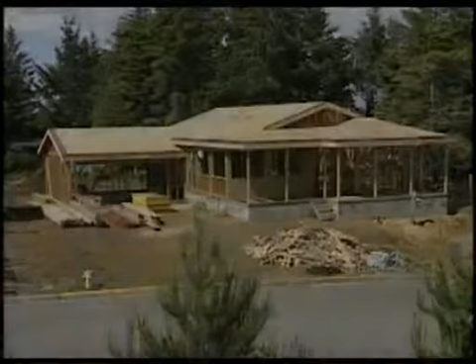Hi, I'm Larry Haun. My brother Joe and I just finished framing this house. It's a one-story, 3-bedroom, 1,600 square foot house, and it's fairly typical of the kind of house that you find clear across the country. Now, normally speaking, it would take the two of us, plus a helper, 1 week to frame it. There's some reasons for that.

It's not a real difficult house to build, but more importantly, we've broken the building process down to the very basics, and we work efficiently. And yet we're always careful not to sacrifice quality for speed. But the building of this house, it's been a lot different. We've been here a whole month. That's because we've had a video crew here recording what we've been doing step by step. We've had a camera looking in over our shoulder at every detail.

The result of this is a series of videos on how to frame a house. And we're real hopeful that these videos, plus a companion book that I've written, will give you the kind of information that you need so you can build your own home. So here's a preview of what you're going to see on this tape.

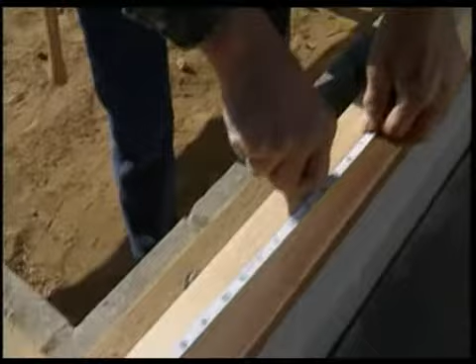The first thing we do in this tape is check the foundation walls for square and parallel. Then we put the sills in place. Next come the posts, the girders, and then we can set our rim joists. Mark layout, roll and nail off the joists, and finally put down the sheathing. 2 extra sections of this tape deal with joisting over longer spans and how to build a set of stairs.

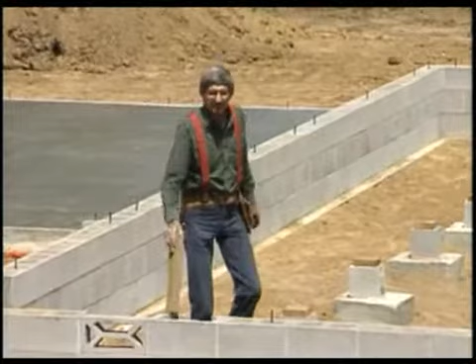You know, it's a good feeling to come on a job that looks like this. It's clean, it's going to be a safe place to work. Any contractor that leaves a job looking like this has to be proud of their work. So we can be pretty sure that this foundation for the crawl space is square and level. And as carpenters, that's our responsibility to check that. Then we're going to put down our mud sill. If this gets done properly, the entire framing process is going to go a lot easier.

So we'll begin by Joe and I checking this building for square. You pull out 6 foot, I'll pull out 8 foot. We're using a standard 6, 8, and 10 check to make sure the block layers left us with a 90-degree corner. Now if they didn't, we'll have to adjust the sill in or out a bit to compensate. Looks great, Joe. It's right on 10 foot. Let's check the diagonal, see if we're square clear across the building.

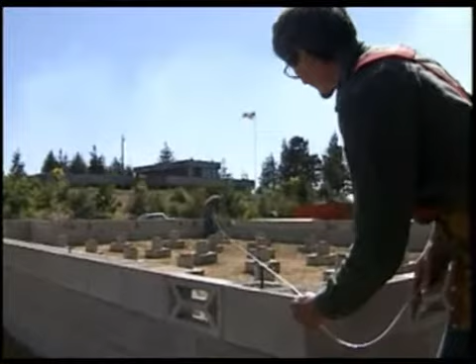This is your best check for the squareness of an entire building. What you're hoping for is that your diagonals are close to the same length. Right on the money. This building's square. Finally, we check the building for parallel. We want close to the same width on each end. 1/8 inch off. That's good. Some of these foundation bolts are bent. It's no problem. Take a hunk of 3/4 pipe and straighten them up.

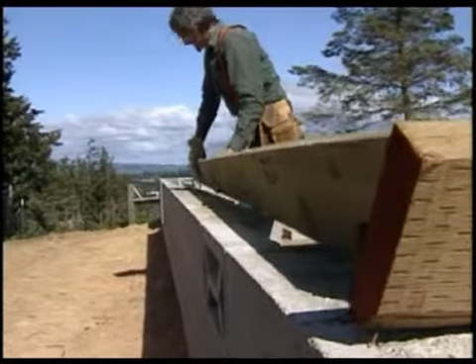Well, it's time to scatter all of our 2x6 sill around the perimeter of the building. It's a treated sill, so it resists dry rot and it really discourages termites. And once all the sills are scattered, we can cut them to length. That's it. Looking good? So, time to cut all our sills. A good efficient carpenter doesn't always have to use a measuring tape and a square to get the work done. Let's take a look how that goes.

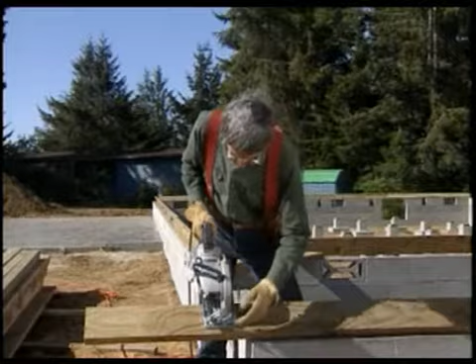First of all, we sight down this concrete foundation. Get our board marked for length. We mark it with a saw cut. We pull the board out a bit. The next step is important. How do we cut square without a square? Well, simple. Line the saw table up with the edge of the board and make the cut.

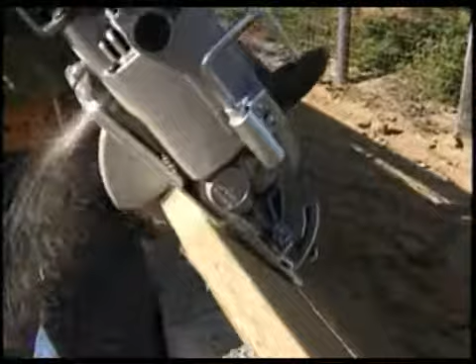Shove this piece of sill back out of the way and take a block of the same material and position it flush with the outside of the foundation. Then we can bring up this piece of sill and cut it to length again without using a measuring tape. Safety is part of being a good carpenter. Wear gloves when you're handling this treated wood. And wear safety glasses, earplugs, and keep that saw guard down.

The next thing we do is mark the bolt hole locations on all the sills. Just align the board flush with the blocks. Okay, looking good. I'll mark the first one here. And then we just tap down with our hammer directly over each bolt. That leaves a mark that we can use for drilling our holes. We use a heavy-duty drill motor and a good sharp auger bit to drill our holes. We drill at least an 1/8 inch larger than the diameter of our bolts.

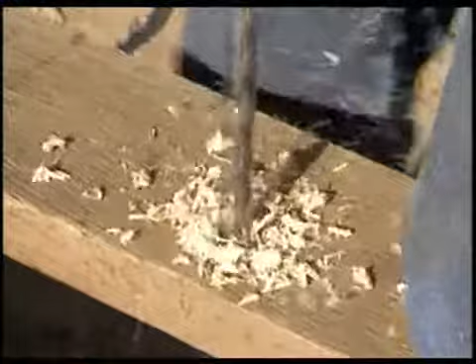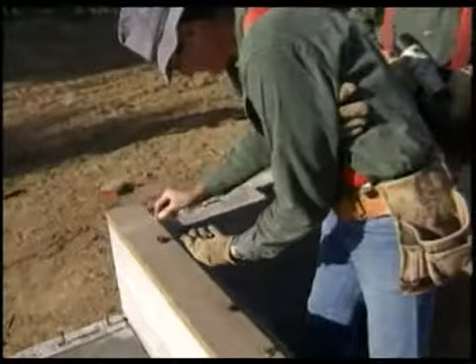To help keep out the cold, we put down a fiberglass sill sealer. You can also buy one that's made out of foam. Check your plans and the local code to see what's used in your area. Now the sills go down. Joe puts washers and nuts on the bolts, and I like to tighten them down with an impact wrench. That's a lot faster than a socket or crescent wrench.

Yesterday, Joe and I finished bolting down all these mud sills. And you remember that we checked our corners for square and our walls for parallel. Well, today we've been going around and making sure that our sills all the way around the building are level. And you know, it really is pretty incredible, but they're close to perfect, about an 1/8 inch variation.

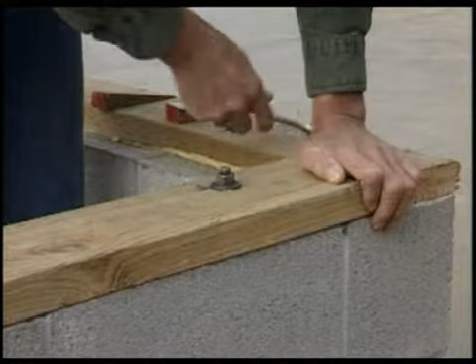But sometimes that's not true. You'll have to adjust these sills a bit. Simply loosen the bolt. Take a couple of treated shims, pick that sill up the desired amount. And this crack here gets filled with the dry pack. It's a dry concrete mixture.

Now take a look at these bolts. They're within 1 foot of the end. That's the code, not only here at the corner, but also down there at the joint. And then every 6 feet, you need another bolt. Now it's important not to take these bolts for granted. They're what keep your house where you want it to be, on the foundation.

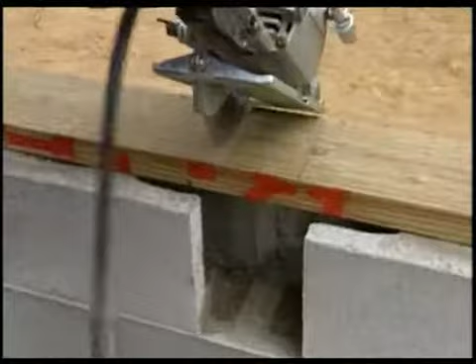The next thing I need to do is cut out for the girders that'll go in these pockets left here in the blockwork. I first outline the cut using a scrap of the girder material, and then I plunge cut very carefully with the saw. Plunge cuts can be made safely with both hands on the saw. One hand controls the switch, the other hand momentarily lifts the guard.

It always helps to have 2 people working. In this case, Joe's going around marking all the girder pockets, and then I work my way around cutting them out.

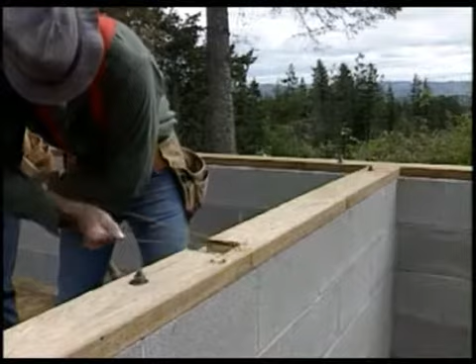Here we're building over a crawl space, so Joe's stretching a dry line tightly across the building from girder pocket to girder pocket. Then he uses a scrap of girder material on top of the pier block, and he measures the length of each post. He marks that length on the pier, and I write it down on a cutting list.

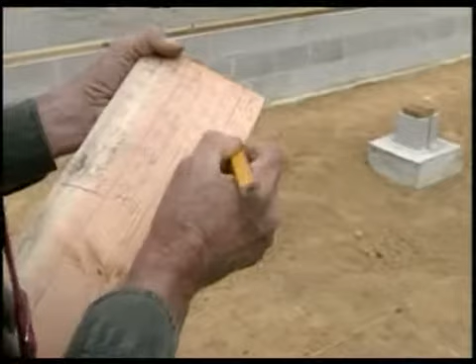If you're supporting larger joists over a full basement, you'll find more information later on in the tape and, of course, in the book. With this cutting list, I can cut the treated 4x4s to length. One of the most efficient tools we have for cutting posts is a radial arm saw, but we don't have one on this job. So we'll be showing you several other tools.

Here I mark the length on each post, and then I cross it off my cutting list. Here's another place I don't have to use a square to make a square cut. Just line that front edge of the saw up with the 4x4 and make your cut.

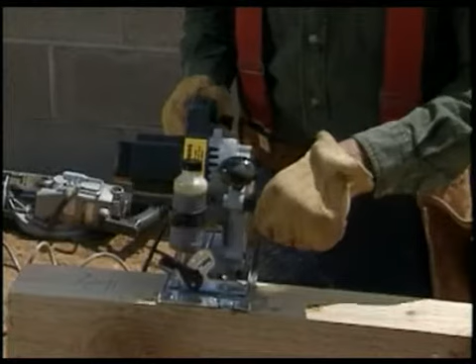There are other saws you can use to cut this 4x material. Here's one. It's a circular saw with a chainsaw attachment. It's got a guard here in the back, but it doesn't have one in the front. So when you're using this saw, set a square on the material, grab it with both hands, and use it in a safe manner. And here's another saw we use to cut heavier stock. We call it a beam saw.

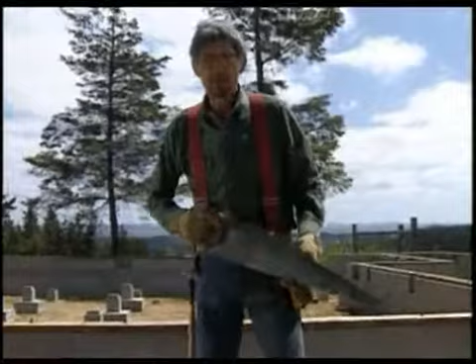And then, if you have a power outage, there's no electricity left in the world, and your electric generator won't work, grab the old handsaw and go for it. And 3 days later, you'll be through this 4x4.

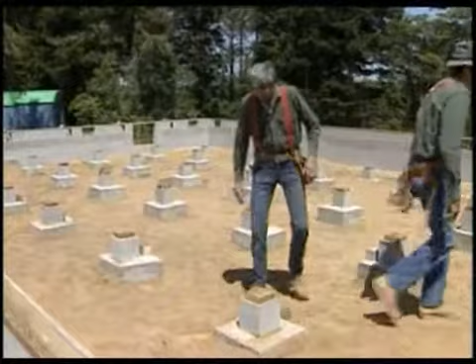Well, we've got all our posts scattered, and we're ready to nail them on top of our piers. Now this one here is in good shape. The post itself is cut square, and the pier is set in good and level. Now let me tell you, I've been on a lot of jobs where this just wasn't the case.

A lot of times these piers get poured out of level, and what happens is that makes the post out of plumb. Now, to compensate for that, you may have to cut this post out of square a little bit. So when you're finished, the post will set square on that pier and give good solid support to the girder up above.

Now that we've got all these posts cut, we have to toe nail them to the piers using 8 pennies, 2 in from each side. You could also use 16s instead. And we just center them on the blocks by eye. Again, these posts are treated, but check the plans and the code to see if they're required in your area.

The next thing we do is scatter and nail all the girders in place. Where the girders fit into their pockets, we cut a block of treated wood to bring them up flush with the sill, and then we nail them off.

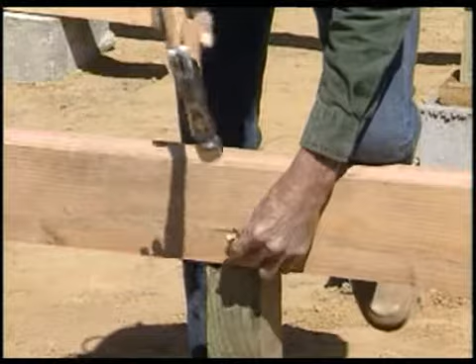Notice that here in the crawl space, these girders are 6 feet on center. Over a full basement, we support larger joists by a girder or a wall in the middle. We nail the girders securely to the post with three 16-penny nails. Now, in some areas, the code may require a plywood gusset or even a metal connector at this joint.

Now, I want to show you something that happens out on the job. These piers, they're poured in line, but let's face it, sometimes they're not done as well. So what happens is, when this post is put in the middle of the pier, you don't have full bearing under this girder. It looks something like this. So what we do is we nail both ends, and then later on we can put in these posts and line them up like they ought to be. So it has full bearing underneath this girder. Then we can nail it down.

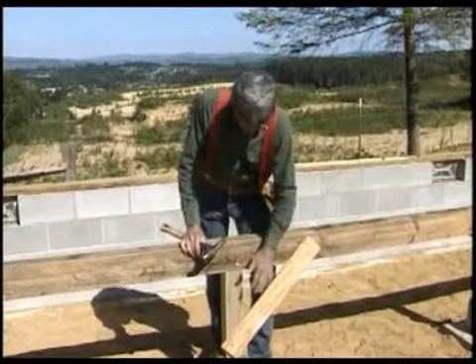Another thing is that when these pier posts are 3 foot or longer, you have to nail a brace on them. That's what the code wants. Well, it's obvious that this post is only about, what, 20 inches long? But this is the way the brace nails on.

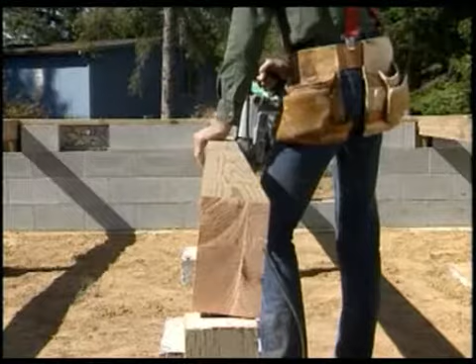Now, beams aren't always perfect. Take a look at this one. It's twisted. We want it to set flat down on that girder post. Let's show you how we do that. When a girder's as twisted as this one is, I just make a cut mid-span right over a post. That way the twist is taken up by two pieces rather than one. That's the way we want it.

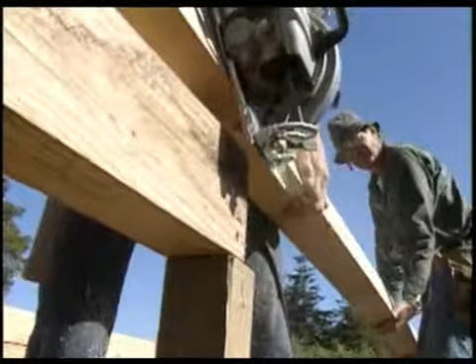Well, we just have a few more middle girders to place. And to do that, we have to cut off some of the ends of the girders we've run in. We wait to cut them to length until after they're all nailed down, so we don't have to use a tape measure. Also, when we nailed them down, we made sure our nails were off to one side so the blade wouldn't hit a nail. You'll note that we're cutting to fit this building. We seldom have to use a tape measure.

Here at the joints, we nail each girder to the post with two 16s, and then we join the splice with 3 more. Now with the girders nailed in place, Joe's taking a moment to sight across the top and make sure everything's flush.

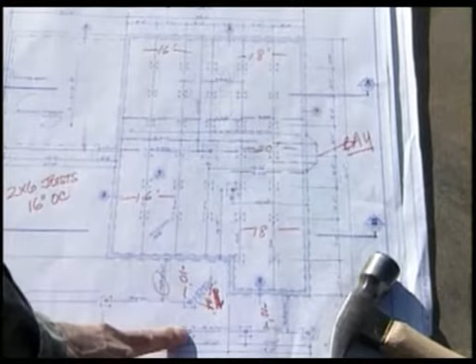So I guess all these joists for this building are 2x6, huh? Right. Except in this front end where we have 4x4s for a deck that's going to be built out here. That'll drop it down 2 inches so we won't have water problems. And then I guess we only take 2 lengths, 16-footers and then 18-footers on over, except here in this area where we've got a little bay window. The cantilever's out 2 foot right there.

It'll take 20-footers here. So I guess we can get started, and right along this side over here we'll run on a rim joist. Right, just use 16s over there for the rim. 16-footers here we'll use for rim joists. We'll get that nailed on, laid out, and pack joists. Let's do it.

Well, moving lumber is one thing a carpenter does a lot of. Make it as easy on yourself as possible. Drop the lumber close to the building and learn to carry it on your shoulder. This is a rim joist. It nails flush with the sill. I nail it tight at one end and then toenail it every 16 inches with 16-penny nails. It's important to tie that rim joist to the sill.

When you're framing up higher, you may need to work off the plate like I'm doing here. Now keep your mind on what you're doing and work carefully. The next thing is to lay out the rim every 16 inches on center to mark the joist locations. I use a crayon, we call it a keel, to make a clear mark at 16, 32, 48, and so on. The marks on the side of the line, these show where the joists will nail.

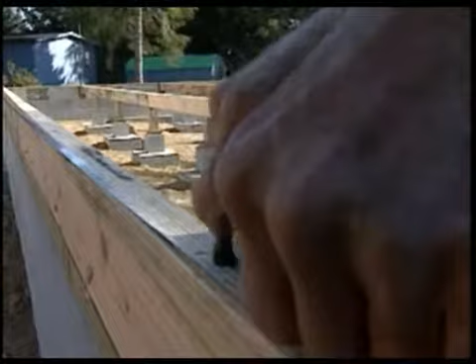Here on the garage slab, we've set up a model floor in order to illustrate a point. This rim joist is laid out just like the one we nailed on. We hooked our tape on the outside, came over 16 inches, made a mark for our first joist, then 32 inches, 48 inches, and so on down the line.

Now, what this means is that when we sheet with our plywood sheeting, this first sheet is going to break half on this first joist. But that's just the way it does down there on our last joist. And it has to break like that because we're going to go on with another sheet.

Now, traditionally, it's been done a little different. They'd hook their tape on the outside, and they'd come over 15¼ inches, make their mark. Then, they'd drive an 8-penny nail in at that point, hook their tape on it, and go 16 inches, 32 inches, 48 inches on down the line.

What that means is that this first sheet of plywood will have full bearing on this outside joist. We don't do it that way. It means an extra step, and structurally, it just doesn't make any difference.

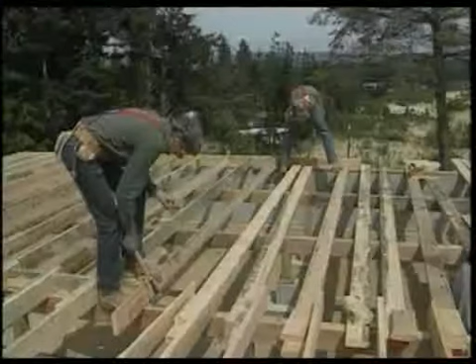With the rim nailed off, time to scatter the joists. Start on one side and lay down a joist every 16 inches. Once you get a few joists down, then you have a safe walkway to carry the rest.

Now we've got the joists scattered on one side, but they're long, so we mark them quickly with a framing square, cutting off the ends for blocks. These go between the joists. It's easier to work here in the middle of the building and cut these joists to length before we scatter all the rest of the joists on the other side.

Once we get the joists cut to length on the far side, then we can scatter those that go here on this side. I push them up tight against the rim, cut off the excess by eye. Just make sure that your joists lap at least 4 inches.

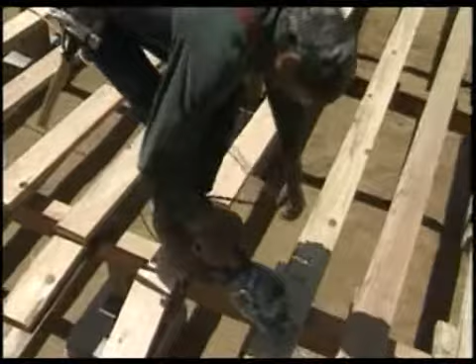Okay, it's time to nail them in place. We roll them up on edge. Then we plumb them by eye on their layout marks. And then we nail through the rim right into the joists with two 16-penny nails. And that's the code requirement. So we're rolling joists. That is, we're setting them up on edge and nailing them in place.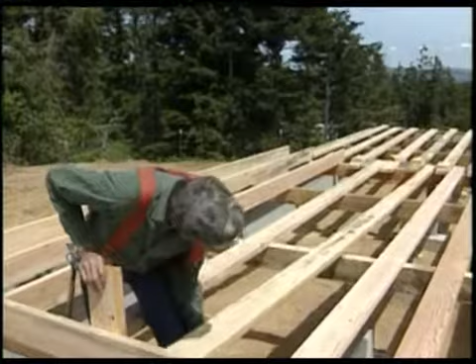Now, frequently, joists will have a bow in them. A crown is a bow. Common practice is to put that bow up. Then the weight of the building has a tendency to push it down straight. But in a building like we have here, we have girders every 6 feet. So crowning joists is not all that important. They're going to be straight once they're rolled. But if you do need to crown them, just sight down it and you can see the bow.

As you nail, try and set up a rhythm. You can set a 16 with one lick or with five, but it really doesn't matter. What matters is that you establish a pace that works for you, going easily from one nail right on to the next. Joists have to be secured not only to the rim, but also to the sill. One 16-penny toenail on each side.

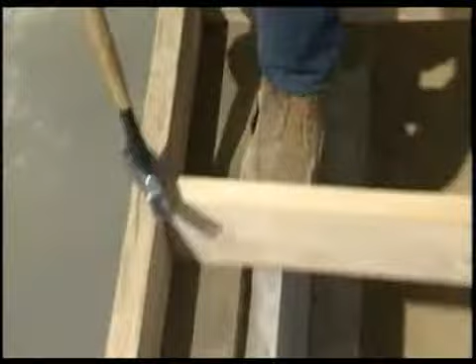Here on the other side, we're pulling our joist back so we can nail the rim on. We waited to nail this rim to show you how we do it when we're working on a second floor. Up high, it's safer to first scatter your joists and then use them as a walkway. Because we're at ground level, we can nail this one off just like the other one. Our building is 48 feet long, and we need several pieces of rim, so we just butt the pieces together. Now it's just a matter of nailing the rim to the sill all the way around the building.

Well, now I'm laying out the opposite rim. It gets laid out on 16-inch centers the same as the other side, but there is one difference. The joists here fall to the other side of the layout line. There's more on this later.

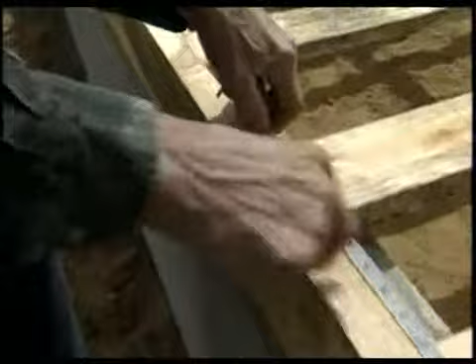Joe and I work together as a team, rolling, nailing off these joists. Joe nails out at the rim, and I'm nailing here at the center. The joists lap here over a girder. I nail the laps together, and then I put a block in between each pair, holding the block flush to one edge of the girder. It's important that these blocks are cut accurately because we don't lay out the center. We depend on the length of the blocks to keep our spacing just right.

Hold on a second, Joe. I want to check our layout, seeing that we're running 16-inch on centers. Yeah, it looks real good. Our blocks are the right length. Here in the middle, I nail in two 16s through the joist into the block. Then lap the joists. The code calls for two more 16-penny nails here, plus a toenail down into the girder. Then another block. Lots of nails here.

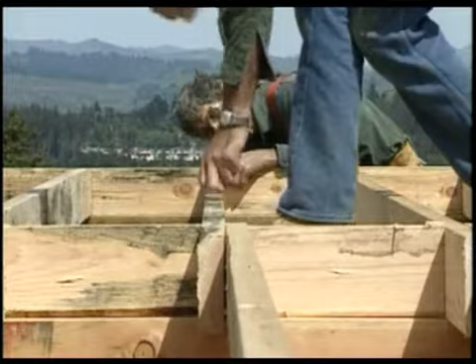Away. Away. Nail. Here we're straightening the joists by eye before nailing them to the intermediate girders. Okay. Okay, away from you, about 1.5 feet. It got the crookedest joist in the city. Back to you now. Back to you. Nail that. All right, looking good. Way here. Nail that. Okay.

Joe and I have been up on that main floor working, but now I wanted to come down on this model floor and show you a little bit more about layout and about how we nailed it all together. You'll notice that on each rim joist, we have a layout at 16 inches on center. The only difference is, here, the joist goes on this side. Over here, it's nailed to the opposite side of the layout. This allows these two joists to lap here in the center. Then, with a 13-inch block nailed in, we maintain our 16 inches on center.

The block gets nailed in with 2 nails on this end and 2 nails in through that joist into the end of the block. Here at the lap, we nail this lap together with 2 16-penny nails. Then down into the girder, you get a toenail down on this side and another 16-penny toenail down through this side. And that's what happens at every girder. We get a toenail here and a toenail here, and at every sill the same. A floor nailed together like this one meets the building code requirements and gives you a good solid base on which to build your home.

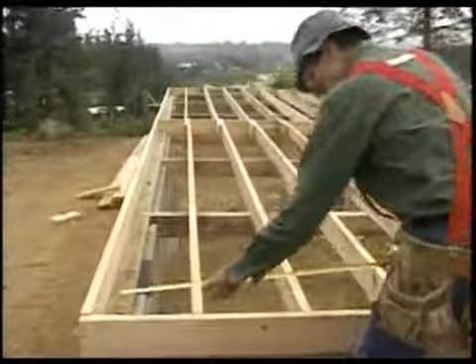Now we've got all of our regular floor joists run in, 16 inches on center, but we need a few more to support the interior walls which run parallel to the joists. Coming back 2/6. Joe's finding the location of these walls on the plans and marking their center lines on the rim. Going forward, 4/3. Now the actual joist will set 2 inches to one side of the center line. This will leave room for any pipes or conduit coming into the walls from below. I'm done.

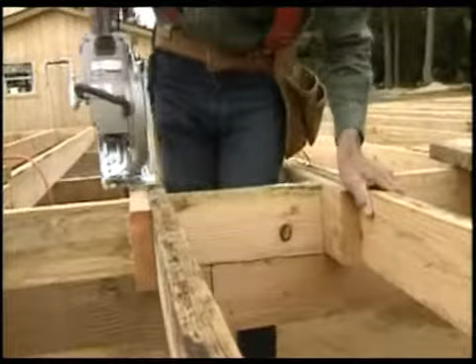Then Joe feeds me these doubles, and I cut them to length by eye, sighting down the block as a guide. Since we nailed the blocking flush with the edge of the girder, these doubles have 2 inches of bearing. When the double comes in from the other side, cut a notch in the block so the double can bear right on the girder, but only cut deep enough to remove the block. We don't want to weaken that girder. That's that one.

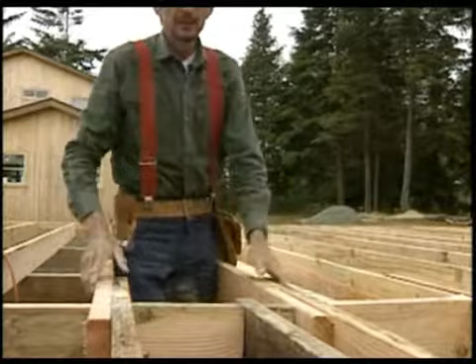This is an access hole for the crawl space, and I have to double up the rim here to support any load from above.

Here we're working on our bay window, and that's why these joists cantilever out over the edge of the building. Because of that, we stopped our rim joist and ran in 14.5-inch blocks to maintain these joists at 16 inches on center. This bay window comes out from the building line 24 inches. So we measure out 22.5 inches, make a mark here, and another one down at the last joist. Then we'll snap a chalk line and cut it and nail on a rim joist, and we'll have a full 24 inches.

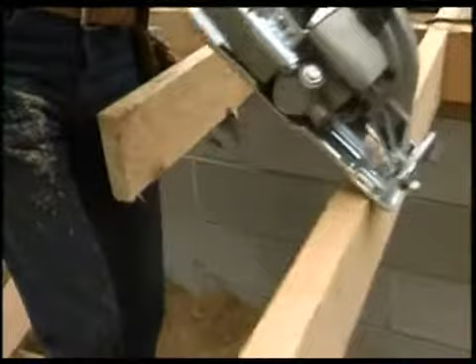You're right, some of these boards are ugly, but the discoloration is only on the surface, and it doesn't affect the strength of the wood. This is Douglas fir framing lumber, number 2 or better. It's strong, and as a framing lumber, it's hard to beat.

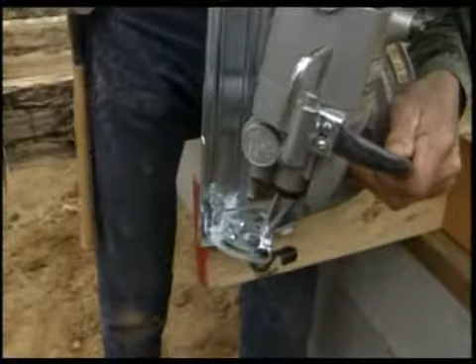You can see that I've let this rim run long. I'll cut it later. Now the front of the bay is 4 feet wide. I found the center, and now I'm marking the edges of the bay 24 inches from that center line. Next, I snap a line at 45 degrees to mark the sides of the bay. I have to lay the saw over at 45 degrees to cut the joists. The rims then nail on with a 45-degree cut on each end. A bay like this really makes a simple building more appealing, and it only takes a little more effort.

I know it's hard to see, but I'm working right here in the middle of a bathroom. Now there's going to be some plumbing coming up here through the floor to serve a toilet. Because of that, we had to cut out a section of this joist. We supported that joist by a header, and we used two different kinds of hangers, a U-type here and an R-type here. Framers prefer this R-type hanger because it only takes 4 nails, whereas the U-type hanger takes 5 nails per side.

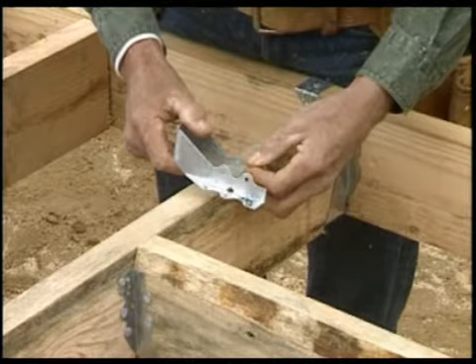But what about if we need a larger hole in these floor joists, like for a stairwell, where we have to cut not only this joist, but maybe this one and several more? Well, if that happens, then you have to double up these side joists. Not only the side joists, but also the header joists. There's more information about this in the book. The floor frame's almost finished. We just had to add some more blocks to support the heating vents.

Well, the heating contractor is finishing up their ductwork, and we're almost ready to sheet this floor. Let's take a look just for a minute at the underfloor ventilation. Here it's in the blockwork, but frequently we'll cut it in the rim joist.

This is easy enough to do. We just cut out a section of rim between 2 joists. Then we can nail that same piece flush with the top to support the sheeting. Then a screen vent gets nailed in the opening. Crawl spaces need vents. A full basement may not.

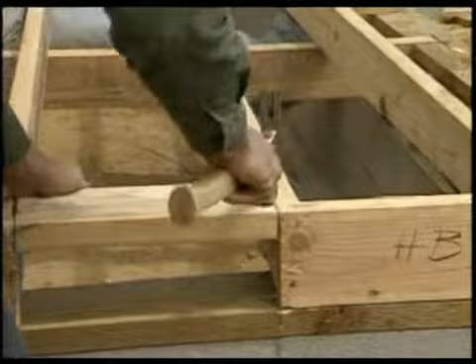We've got all our regular blocks cut. Now we're cutting specials. No need to use a measuring tape. Just shove a block in the hole, make the cut. A special is any block that's not a normal length, like here at the end of the building.

On this section of rim joist, we had to cut out for 4x4s that will be used as joists here on the porch. After these are sheeted with 2x decking, the porch will still be lower than the house deck, preventing any water from running inside. We mark for the cutouts with a piece of scrap, and we make the cuts.

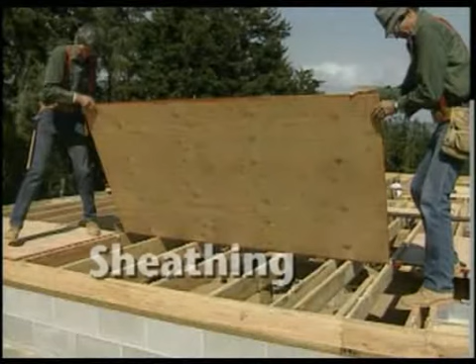Well, now we're ready to run our first row of 3/4 tongue and groove plywood, sheet this building. I came off the corner here 4 feet and a half inch. That leaves room enough for our 4-foot sheet of plywood, plus a 1/2 inch for the tongue that's going to lay to the outside edge. Now it's really important to get a straight line all the way down through there for our first row.

To do that, we're going to use a string. Carpenters call it a dry line. We're going to pull that all the way down through there. I'll mark a couple times in the middle, and then I'll snap a chalk line.

It isn't necessary to use a dry line on a short building. I'm using it here to show you how we do it if the building is longer than your chalk line. Just run out the dry line, mark the middle of the run, and then you can snap twice.

This is 3/4 tongue and groove sheeting. It's strong, but your code may only call for 5/8 or even 1/2 inch. Here, Joe and I are scattering an entire row out in front of us.

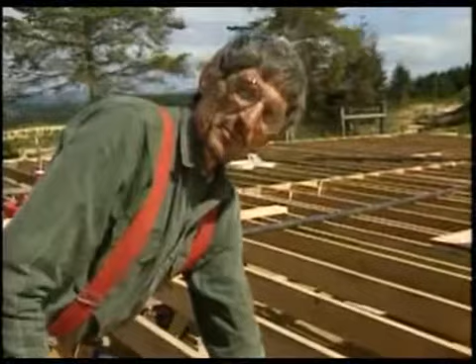Plywood will expand in wet weather, so we leave an 1/8 inch gap in between those joints. We just stick in an 8-penny nail, then we're ready to nail it off. On longer runs, leaving an 1/8 inch gap between the sheets means the ends won't always break on a joist. Now, when that happens, just trim a sheet or scab on a 2x to give the end full support.

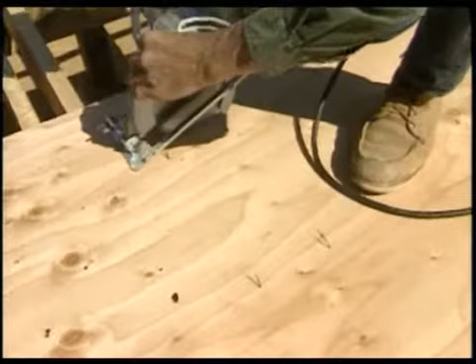19 1/4, 24 1/4. 19 1/4, 24 1/4. We've got the edge of this sheet of plywood right on the chalk line. Joe measures for the heating duct. You're right on the line? Yes. 24 1/4? 40. And 40. And then I mark it out. Got it. And then, with careful plunge cuts, I cut out by eye between the marks.

That's pretty bloody incredible. I'm sorry I ever questioned your ability to measure.

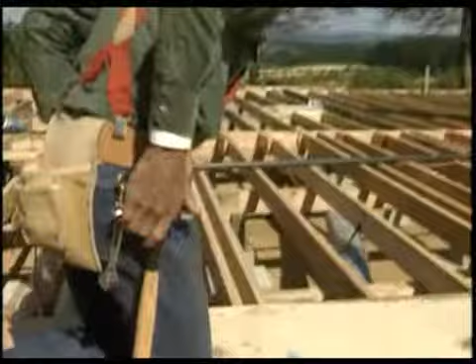We're hand nailing on this floor for a while. Normally, we nail these floors off with a nail gun. But a lot of people don't have a nail gun, so there's no reason that you can't learn to be a fast nailer. Take a bunch of 8-penny nails out of your pocket.

They come out looking like that. But you grab all the nail heads that are face down, pull them out, put them up. Then they'll look like that. Now you can finger those nails out one at a time. This is the way it goes then.

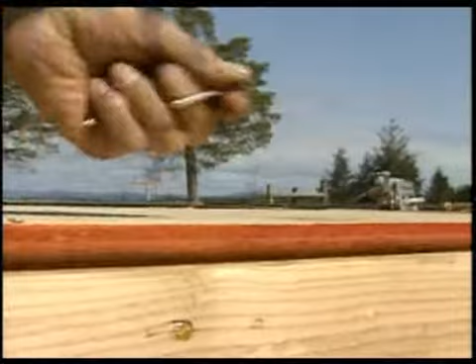I'm using a drywall square to mark a half sheet, which we position and nail down at the end of the building. You always want to stagger your plywood seams from course to course. So we start every other row with a half sheet.

Tongue and groove plywood needs some persuasion. Right side. And it's helpful to have two people. Get it, tap it. Joe uses a 2x beater block along the groove side of the plywood. The 1/8 inch gap between the sheets can be maintained by using a nail or by eye. Don't beat on that sucker too hard. Okay. You got it, Joe. Looking good. Let's nail her off.

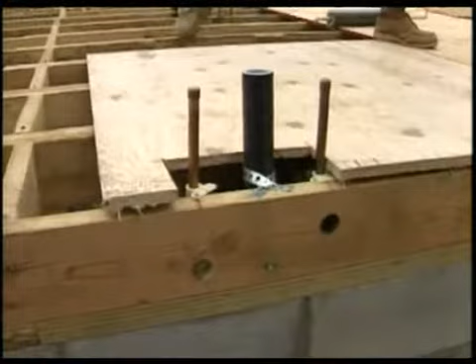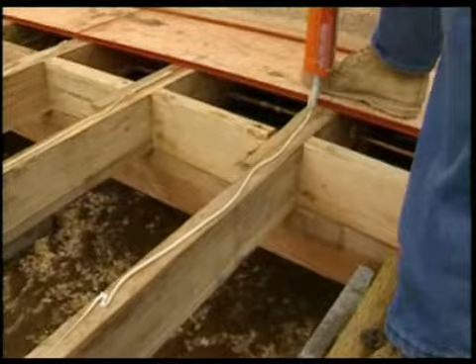We also have to cut out for plumbing pipes. There we go. 45 1/4 center. 45 1/4. Both of them. Both pipes. That's the copper pipes. Yeah, there we go. 31 and a half, 39 3/4. 31 and a half, 39 3/4. I'm just marking the centers of the pipe, then I cut around them by eye. That's got it. That leaves an 1/8 inch gap.

Well, it's nice to have help when you're nailing off a floor by hand. The small hammer works, as well as this pneumatic nailer, which speeds up the process. The plywood ends that overhang the rim are marked with the chalk line. And then they're cut all at one time.

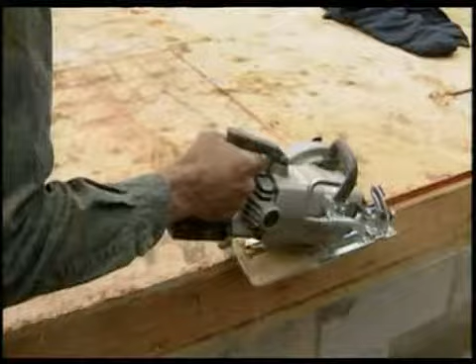Well, we're almost done. We just have to sheet the bay area here. And again, we don't cut first, we cut later. We nail down a full sheet, 12 3/4, mark for the rim, and cut it out. Get the diagonal snapped here. Over just a bit to your right. That's got it. Go ahead and snap.

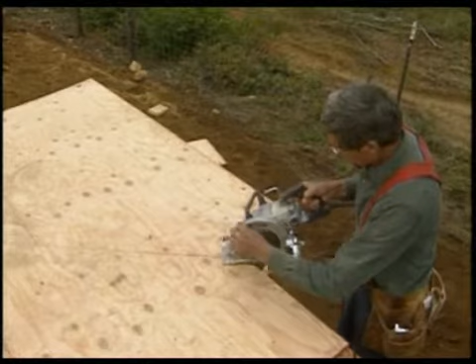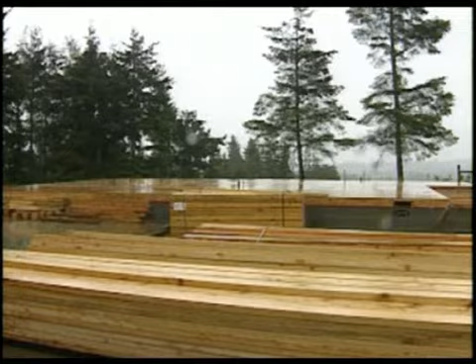Well, at least it dried up enough that we can pack these cedar boards that Joe had cut at a local sawmill. Again, we lay the first board to a line so it'll be absolutely straight. Snap, Larry. You ready? I'm ready. All right, lay it on the line. You got to give me a little bit. Okay, I got about 1 inch here. Looks good. Okay.

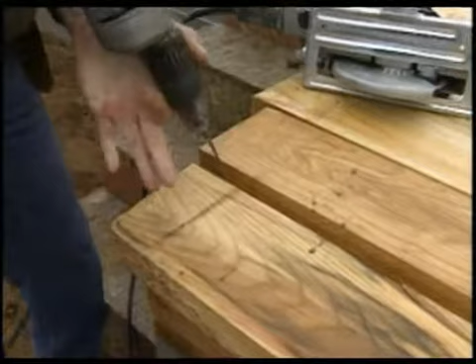Then, because we're screwing these down, we drill pilot holes through the decking. Here I'm using a drywall square as a guide to keep the holes in a good straight line. Then I screw the boards down with a 3-inch non-corrosive screw. And here at the end, Joe snaps and cuts.

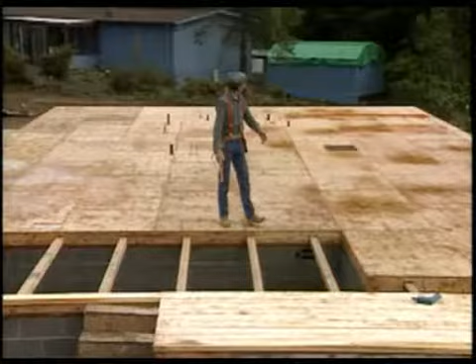Wow, it looks like we're finally going to get a break in the clouds and get a little sunshine on our backs. But in spite of all the rain, look, we got the floor all down. The deck out here we'll finish up after the exterior siding is put on. I want you now to take a look at this floor. It's a pretty typical floor.

It may be a little bit different from the one that you're going to build, but let me tell you, the basics, they're the same. There isn't anything complicated about what we've been doing out here. It's just a series of simple steps that if you follow them, you can build the same kind of solid floor that we have here. Solid so that when you roll your grand piano out in the middle of this floor, it won't fall through. Anyway, we're ready now to get our lines down, put our plates down, and start framing walls. So let's do it.

Well, as you can see, we've jumped way ahead in this building process. The floors are all down, got the walls built. Here we are, joisting on the second floor. But this is a one-story building. We put these joists up here just for demonstration purposes. We wanted to stop for a little bit and show you how to joist with heavier joists. In this case, 2x12s. Here we have a built-up beam, and we're putting on hangers.

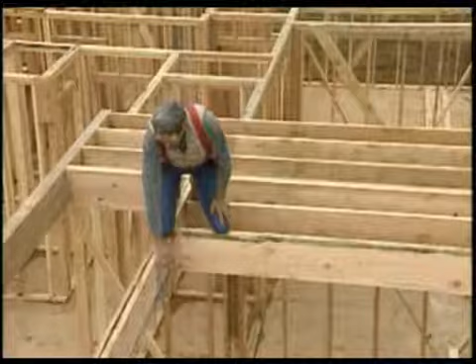Now, it won't be long before we'll take all of these joists out of here and we'll get on with the building process, putting on ceiling joists, nailing in rafters. Out there on the outside edge, those joists are going to be cut to length and we'll nail on a rim joist just like we did down on the first floor. Here you'll note, in this section, we left a large opening so stairs could come from that first floor up here to the second floor.

These hangers can carry a lot of weight. Place them right on the layout and drive a hanger nail in every hole. Now, whether over a basement or second floor, larger joists are frequently used because they can span a longer distance and carry a heavier load without any support.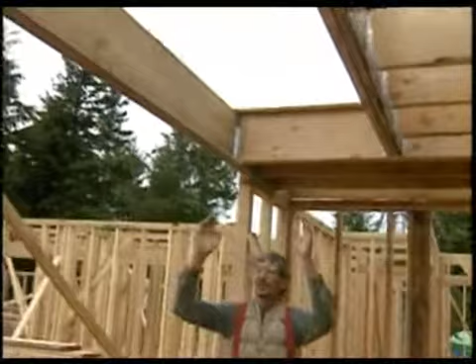When your house has a second story on it, you have to build a flight of stairs. So we want to show you how to build a simple set of straight flight stairs, just like this one we have here in the small model. It's going to go right up here in this hole. It's called a stairwell. Now, to begin that process, you have to make a measurement.

Hook your tape on the subfloor and measure down to the subfloor. It's 109 inches. It's really important to note that that measurement has to be from finished floor to finished floor. Now, we've got carpet throughout this building, so that measurement's going to work. But if you happen to have a real thick floor up there, and down here you had a thin floor, then you have to make some adjustments. There's a lot more about that in the book.

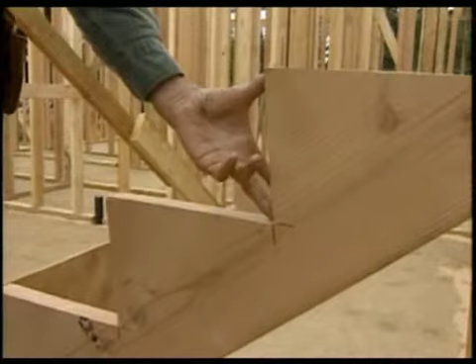Now, with that one measurement, 109 inches, we're able to calculate how many steps we need and how high each one of those steps or risers is going to be. Let me show you how we do that. To calculate the rise and the run of a set of stairs, we take the total rise from finished floor to finished floor. Here it's 109 inches. We divide that by 7. That's a standard riser height. That gives us 15.5. Well, you can't have a half a riser. So we divide 109 by 15 full risers, and that equals 7.26 or 7 1/4.

Now, a common rule in order for a flight of stairs to be comfortable is that the rise plus the run should total between 17 and 18 inches. With our riser height at 7 1/4, a run of 10 inches, that gives us 17 1/4. That's right in the ballpark. Well, we know our rise and run, so we can set up our stair gauges on this framing square. Over here, 7 1/4 for the rise, and here, 10 inches for the run. This is the tool we use to lay out this stringer so we could cut out these notches.

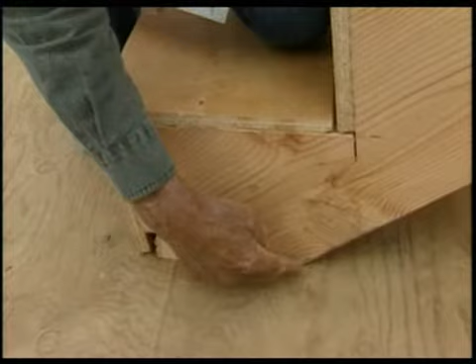Now, you'll notice right here that this angle is not 90 degrees. We like to give it a 1-inch back cut right here, so this tread will be just a little bit wider. Now down here at the bottom there's something really important. We call it dropping the stringer. What that means is that we have to cut off of the bottom of these stringers the thickness of this tread. Well, the tread is 3/4 of an inch thick, so we cut off these stringers 3/4 of an inch. Now that means that all of these risers will now be the same height.

One last thing, we notched our stringers like this. That allows us to put in this 2x4. We call it a kicker. Once that kicker is nailed down, it keeps these stringers from slipping forward. I start layout from the bottom, marking the first tread and rise with a square. Then I need to mark for dropping the stringer. I make a line representing the floor and then come up the thickness of a tread, 3/4 of an inch, and mark the cut line. Only this bottom riser needs to be shortened since it rests on the floor.

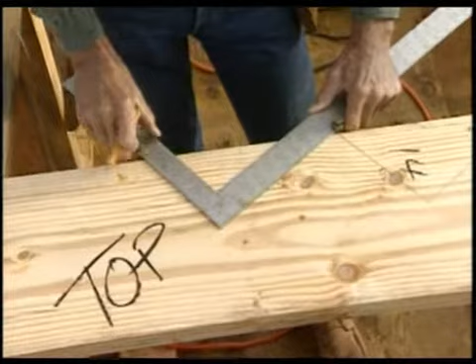I continue on up, marking out rise and run with a square, and I keep track of the number of risers as I go along. Now up here at the top I mark for the last tread, making it 1 inch wider than the rest. And square off the run from that point. You'll see why I do this in a few minutes. I've got a few more marks to lay out.

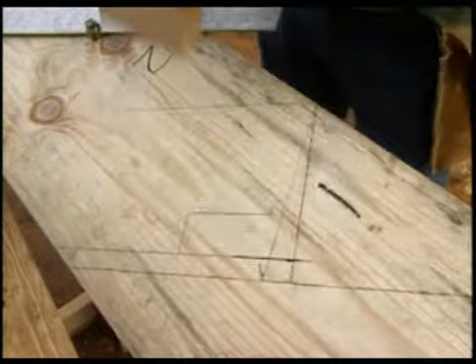Down here at the bottom, I come in 1 inch from the riser line I marked before, loosen my stair gauge, pivot the square to a new mark, and tighten the gauge. Now I can mark for the back cuts on each riser. But before I move too far, I also use a scrap of 2x4 to mark the notch for my kicker. And finally, I can saw everything out. I'm careful not only to mark accurately, but to cut accurately. That way I can use this stringer as a master template.

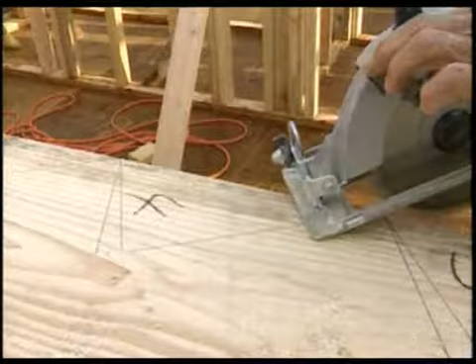You can see that on top here, I'm overcutting the intersection of my lines just enough so that the pieces will fall out. That way I don't need to come back with a handsaw to finish up. And to be efficient, I make all cuts running in one direction first, then turn, and work my way back. You can see how the cuts meet underneath here.

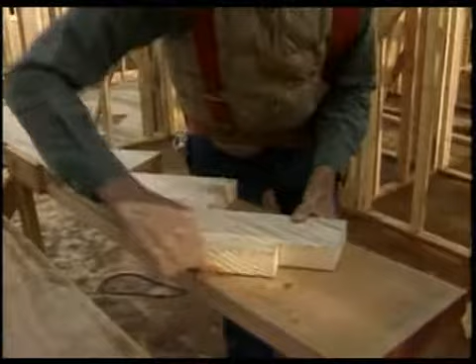The next thing I do is nail fences on the edge of the stringer. That'll help me to flush it up with the other 2x12s, and I can use it as a template. Now you want to pick out good straight stock for your stringers. Boards free of any large loose knots. After marking, I cut the other 2 stringers the same way.

Next I mark where the top of the stringers fall on the header. For the stairs in this house, I mark down 1 riser, 7 1/4 inches, from the bottom of the subfloor, and I draw a straight line. One way to support these stringers is by hanging them with these metal straps. Other ways to do this are shown in the book.

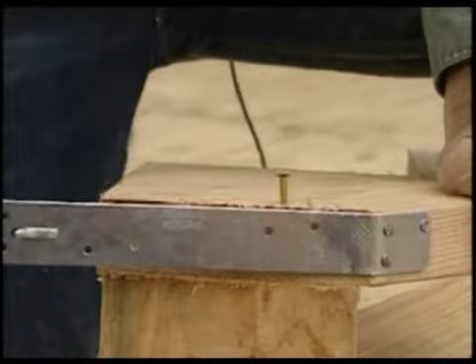Then I nail a block flush to the back side of the first stringer. It's just long enough to space the middle stringer dead center. All right, hold on, down a hair. Hold him right there. Got it on the line? Yeah. All right. Hold it.

Holding the top of the stringer even with the line, Joe nails it in place. Then positions and nails the middle stringer. On the line? No, it will be. Hold it right there. I got her. two 16s into the block and one 8 through the strap. Now the last stringer, tight to the joist on the right. Then we measure and cut a second block to fit tightly between the two and nail it off.

Down at the bottom, the kicker, cut to the width of the stairs, goes in. I flush it up tight against the wall, nail it into the floor. Center up the middle carriage and nail all the stringers down.

It's time now to cut the treads and risers out of 3/4 stock. Here's one way to get a straight cut, by using a board as a cutting guide. You could, of course, use a table saw. And here's a riser being cut. I start at the bottom by nailing on the first riser with 8-penny nails.

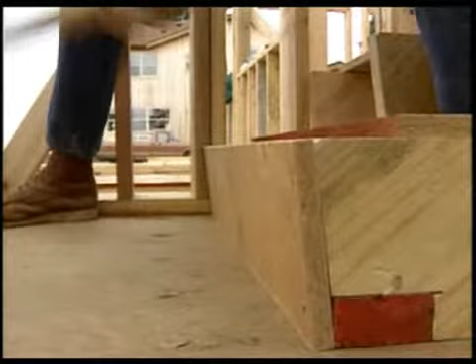Once these stringers are nailed in, you need to check to make sure that none of them are bowed up or down. Take a look at here. This stringer's really high. So what we've done so far is nail in a riser board at the bottom to hold these stringers stable. But before nailing any other riser boards in, we want to catch this one. We want to make sure that these stringers are level all the way across. So we can nail it here on the outside edge.

And Joe's going to help. Pull that center horse down so I can get this outside one nailed. I always choose straight stock, but when I was cutting this middle stringer, I could feel the tension release, and it bowed. He's got it right on the money. Hold on, I want to get one more nail in that thing, Joe, to hold it down there. All right, that's got it. And now all I need to do is finish nailing off the risers.

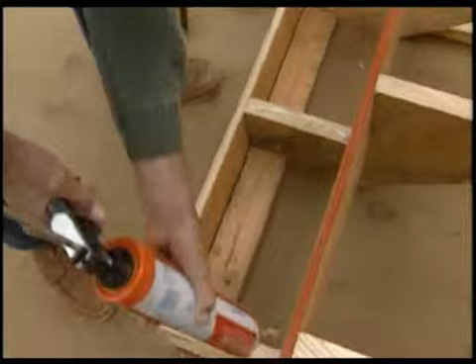Now the treads. To prevent squeaks, you want to use construction adhesive on top of the stringers before you set the treads. That'll also strengthen the entire stair. You can either use nails or screws here. Just make sure to flush everything up first.

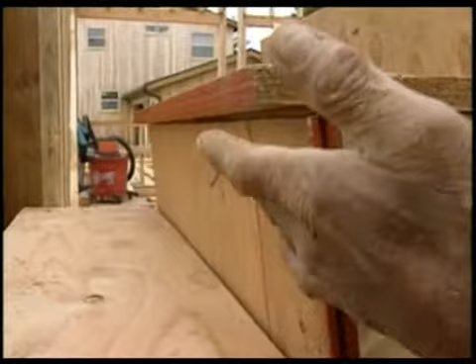Now there are different ways to nail on these treads. You'll notice that we cut ours flush here with a riser board. They're going to wrap carpet right up around that. But there is another way. You can let your tread hang over right here and you'll have a nosing. The last thing we need to do is nail in a 1-inch strip here at the top before we nail the last riser in place. You'll see why in a moment.

Well, we're back here now on this model, and I want to show you something. You'll remember that we cut this tread right here at the top 1 inch longer than the rest of them. Well, we did that for a reason. The reason is that we wanted this last riser here at the top to angle back, just like this one angles back. Well, it was easy to do. We nailed in this strip of 1x, then the riser board. Now, look at the way it angles back. So now, every riser and every tread in this set of stairs are the same, all the way down.

I've taught a lot of students, apprentice carpenters, how to build these simple set of stairs. And I think almost every one of them thought the stair building was really difficult. And then they tried it, and they found out this isn't so hard. All we have left to do to finish these stairs is nail on a few treads and risers.